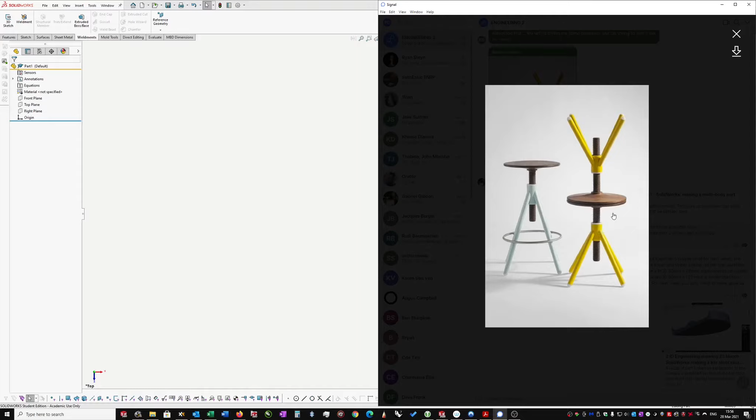In this video I'm going to show you how to make the base of this stool and the post and how to get them to move relative to one another. So I have a fair idea of the proportions of this bar stool and what I'm going to use, so I'm going to hop straight into Solidworks.

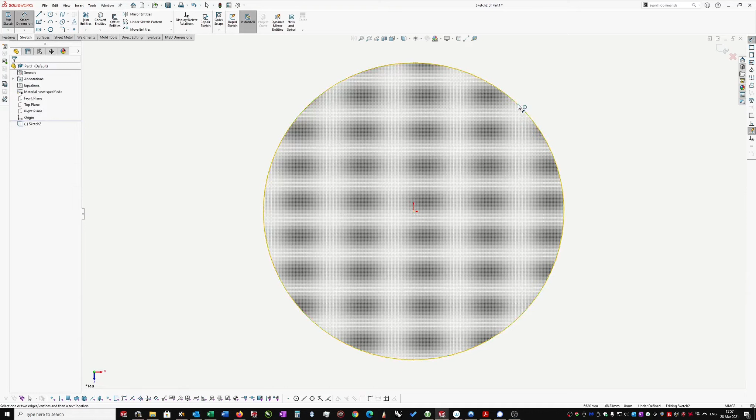So I'm using Solidworks 2020 and I've just created a new part, and I'm going to create a sketch on the top plane. And I'm going to sketch a circle. Actually, let's first dimension this. That's going to be about 500 millimeters. And then I don't need this to be solid, so I'm going to make it construction.

And now I want to put in some points that will be used to locate the feet. So I'm going to go one like this. Now I could, if I wanted to, do a circular pattern, but since there are only 4 of them, I may just as well click the 4 points like this. Just make sure that they're black. So those are on the 4 quadrants. They're 90 degrees to one another, and they're determined in size by this dimension here.

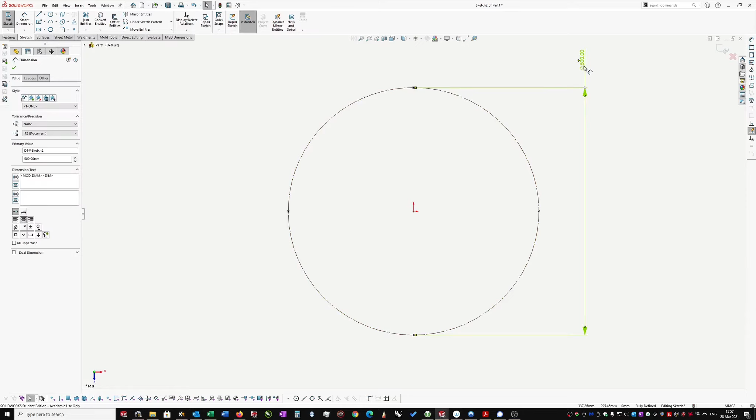So I'm going to exit that. Okay, so that's the base. You can see it's on the top plane. Now I need a second plane to be able to create the apex of the feet. So I'm going to select the plane, hold the control button, and drag another plane out. And then I can fill in on the left hand side how high I want that. So let's make that 300.

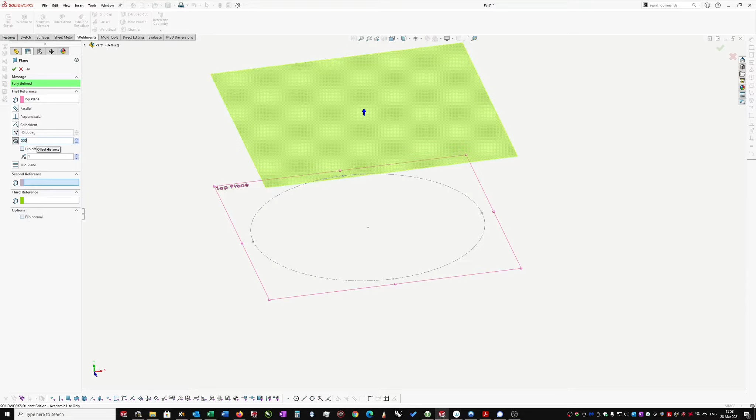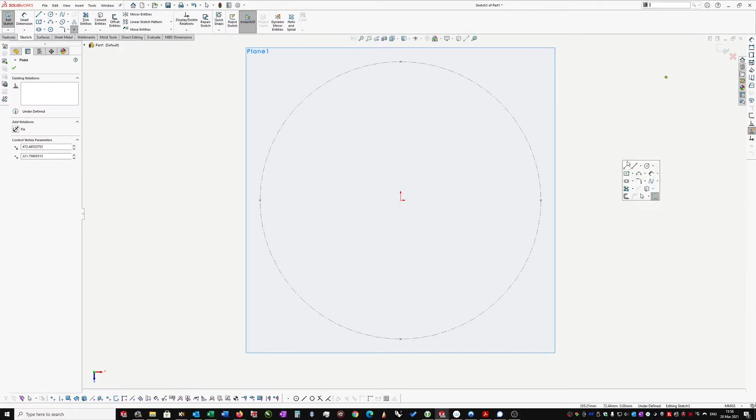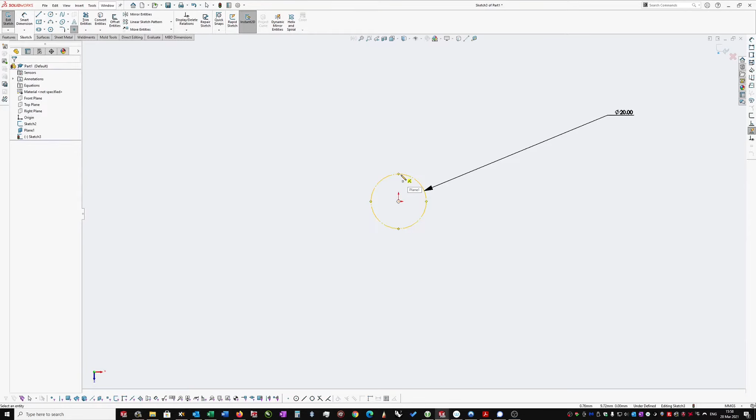Say OK. And then on this plane I'm going to enter a sketch, and I'm simply going to select the center, the origin point, and put a point in there. In fact, let's do this. I could put in another control circle. Let's make that quite small, like 20 millimeters, and make that construction. And then I need some more points, so one on that quadrant, this one, and the last one. Exit that sketch.

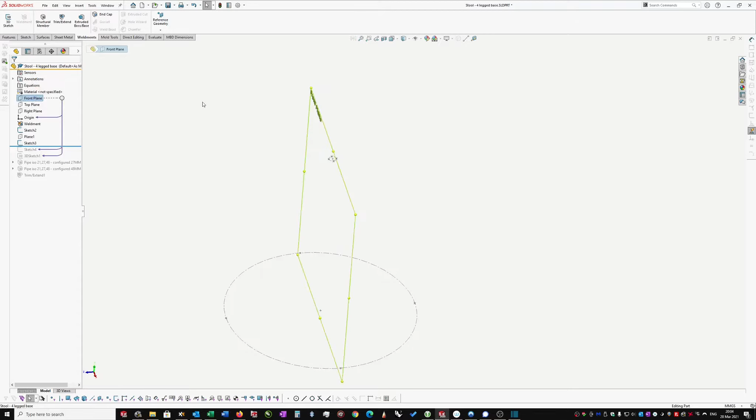Okay, quick edit. The line that I needed to draw in the center here didn't go so well in the last video, so I'll show it to you again. I'm going to select either the front or the right plane and put a sketch in here, lock that in place. I just need a line. I'm not going to draw this line to any of these points because I want to control it a little bit differently. Let's just do that again.

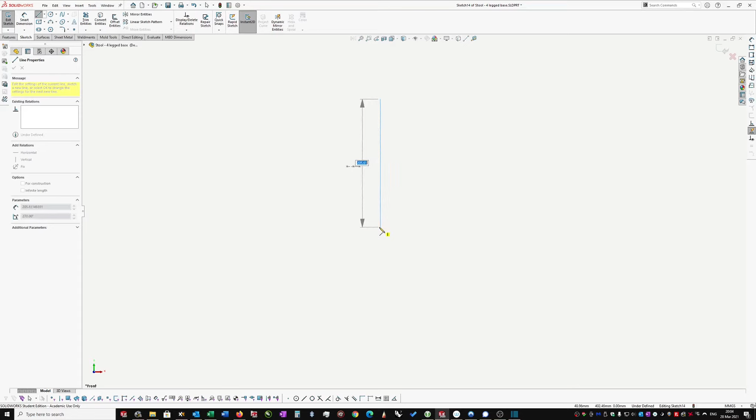What I could do is drag, and because I've got a certain command on, I can actually type in the dimension I want while I'm holding the left button down. Hit enter, and it'll put the dimension in for me. Right, so now I'm going to drag this around, because I want a little bit of the top of this line to appear above this sketch, and I want to be able to control that height.

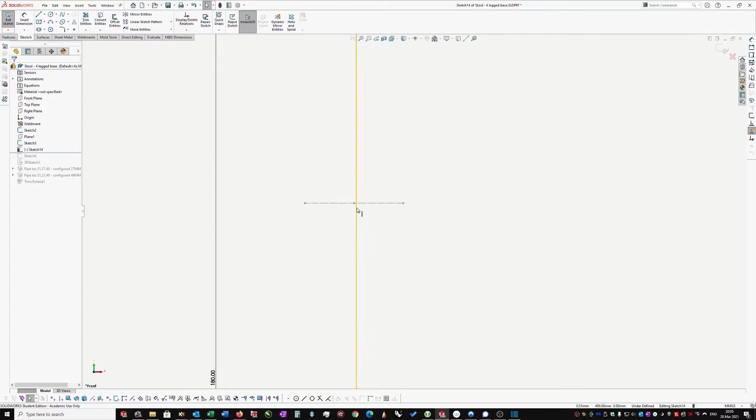Okay, so I'm going to click on the line, click on that point, and say to make them coincident. So because I've established what the length of the line is, that's fixed. I now just need to go from that point to there and say I want that to be whatever I want it to be, 70 in this case. Go out, right, and then you should continue from here.

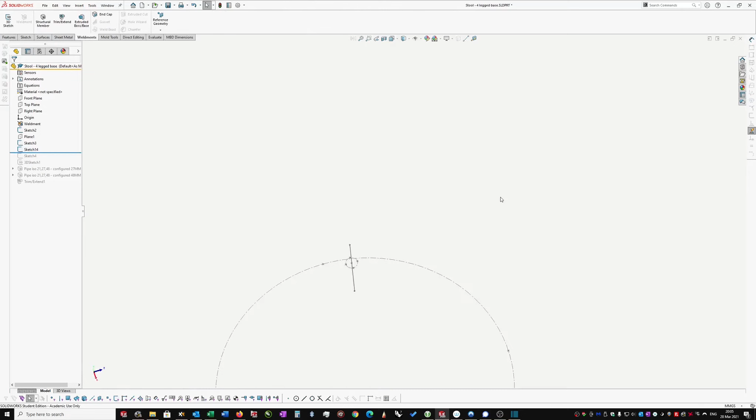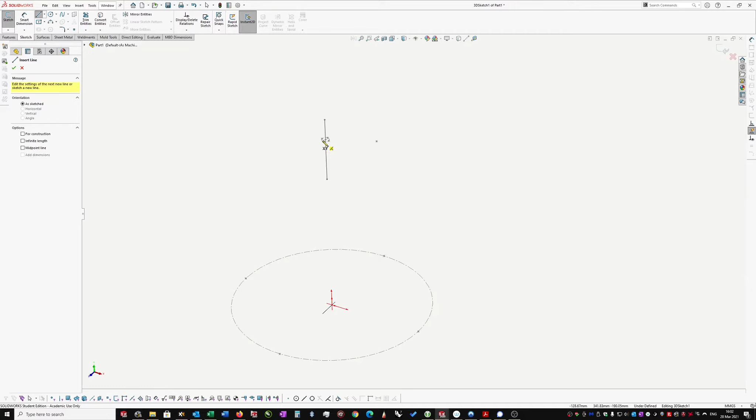Click on weldment, so that places it right at the top, and then I'm going to click on 3D sketch and put in. So this 3D sketch can be quite tricky until you know what you're doing. But for now, because I'm just using points to locate this, I don't have to worry too much. As long as you select those points in the same orientation, you're not going to have any problems. This is good enough for what you need to do now. Right, so that's going to be the basis for your 4 feet, and that's going to be the pillar.

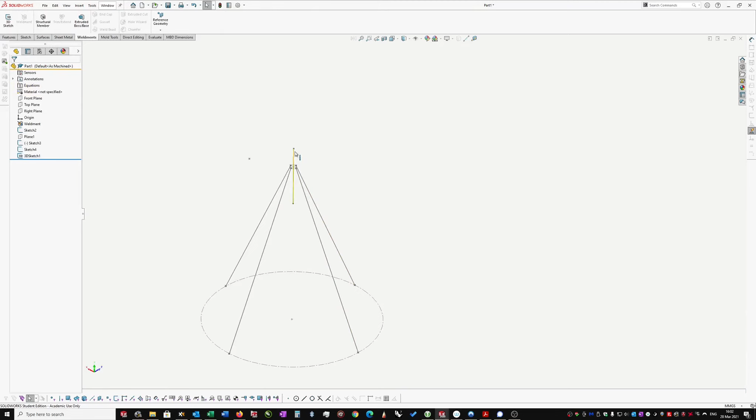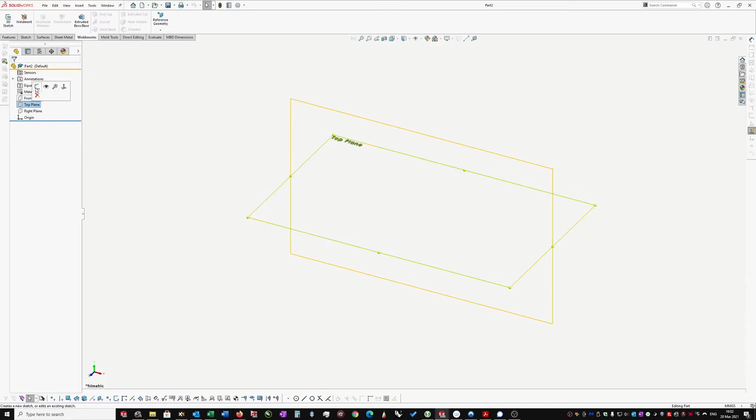Now we need to hop into a separate file. So I'm going to create a new part file, and I'm simply going to create sketches which describe the outside diameters and the inside diameters, the ODs and the IDs, of the tubes or the pipes that I'm going to use in that weldment file. So on the top plane, I'm going to enter a sketch.

And just to show you, I'm going to be referring to, not that one, let's delete that. I'm going to be referring to this table here, which is a set of the DN specifications for pipes, which is what you're going to have to use to specify anything using pipes. So it's a good idea to become familiar with this.

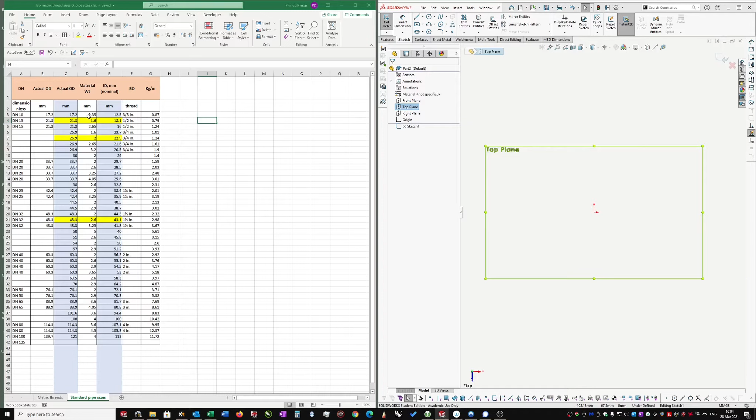So I'm going to use 3 pipe sizes. We only need 2, but I just want to show you something about how to use configuration. So we're going to use this DN15. I don't know what this 26.9 is. It's probably a DN17 or something. And then this DN32. So the OD, that's the outside diameter of each one of these, is 21.3, 26.9, and 48.3. And then the material weight, you can see that's the thickness, and then the ID is given. So these 2 dimensions, those 2 dimensions, and those 2 dimensions.

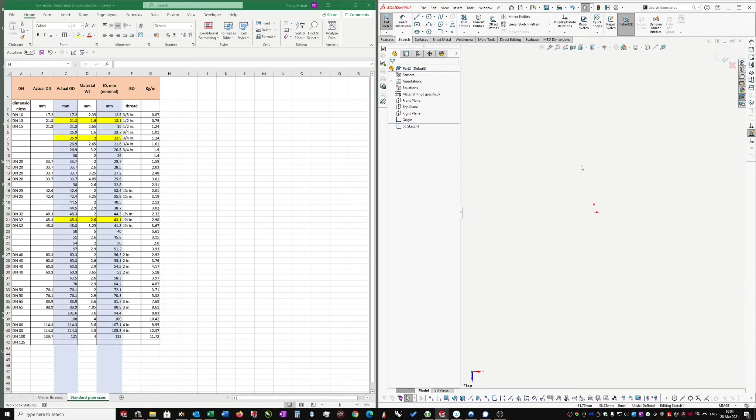So let's start with a circle, which let's create another one like this, and I'm only going to create one set of circles, and I'm going to dimension them from smallest to largest. So I'm going to go from that figure there, 18.1, enter, and then dimension this one, and that'll be 21.3. Enter, and then I'm going to exit the sketch. Oh dear, I think I left behind a dimension there. Yes, I did. I deleted it by mistake. Right.

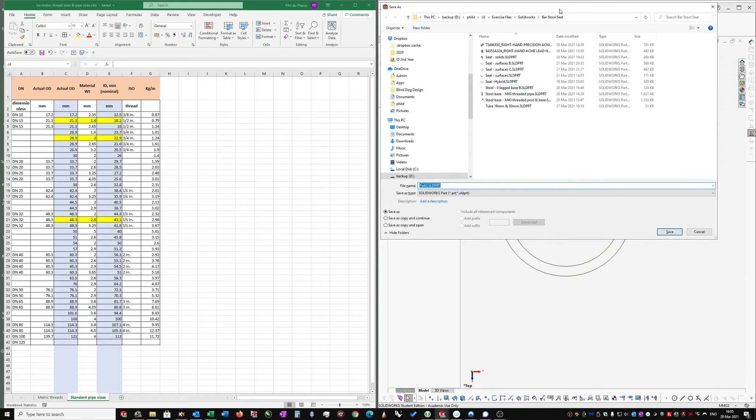Good enough. Alright, so now, because I'm kind of lazy, and because I know that I'm going to need 3 different sizes and I want them all in one place, I'm going to use the configuration manager to do that. But let's save this file first. So I'm going to just go and overwrite an existing one if it's in here. Tube. Let's call it pipe because that's more accurate. Just going to give it 21. I'm not going to worry about the millimeters. 27 and 48.

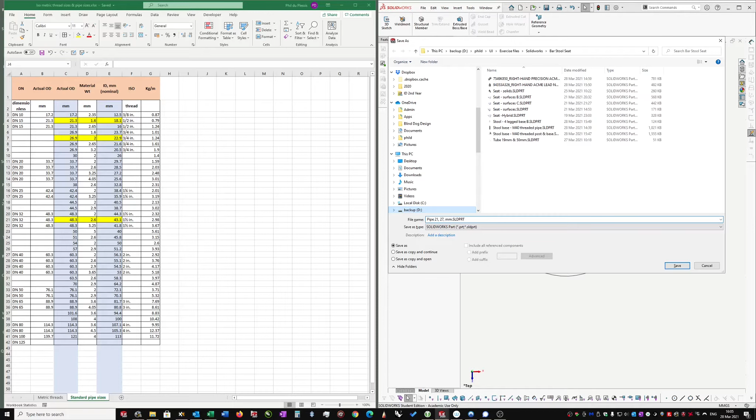Okay, so if you go into the configuration manager, which is the 3rd tab at the top of your feature tree, you'll see there's a configuration manager where you can now drive your configurations. So the first thing I want to do is I want to rename this default one. I just click and go. You should be able to click once and then hold it down and let go. And this one is going to be the 21. So I'm going to say 21 by 1.6 because that's the thickness.

Right, so I'm going to now create a new one. I'll right click here and I'll say add configuration, and let's call this one 27 times 2. So that's the 26.9, and the 2 millimeters is the wall thickness. And I'm going to create another one, add configuration, and I'm going to call this one 48 times 2.6. Okay, so there's the 48, and we're going to use the 2.6 millimeter wall thickness. So I've got 3 configurations.

At the moment, if I click on any of them, nothing happens to this sketch. But if I click on that configuration and I now click on the sketch, I'm going to double click on this dimension, and before I change this, have a look on the right hand side here. You'll see these 3 little bars. If you click on their little arrow, you'll be able to specify which configuration this dimension will apply to. So I'm going to click on this configuration, and we're going to change that to 26.9 and say OK.

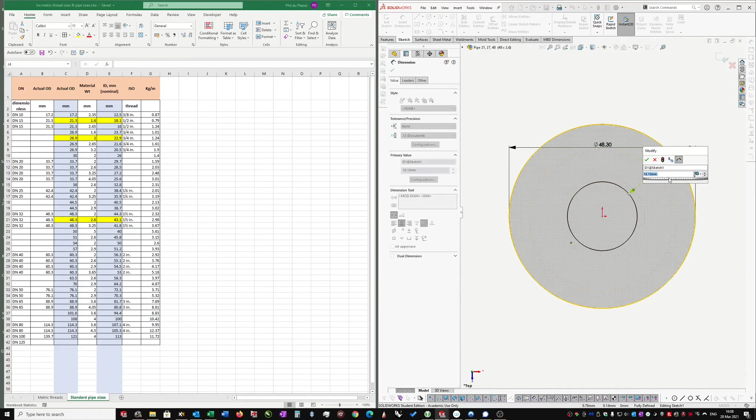So let's double click on the third one, click on the sketch. If you don't get the dialog box on the right hand side here, you can, on the left hand side here, go to configurations and say this configuration, make sure it's chosen the one you want, and let's make that 48.3, enter, double click on this one, and that should be 43.1.

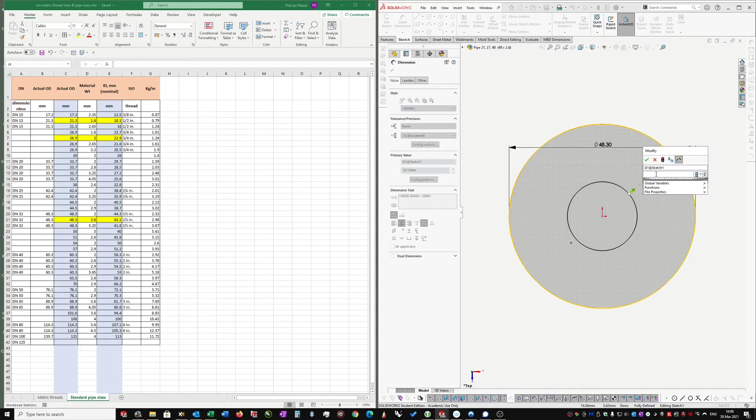Enter. Sorry, I don't want the variable there. I'm not sure why. Oh, unfortunately I clicked on this and I created a variable. We won't do that now. Let's hope it doesn't go back to the variable. Nope, it hasn't. Okay, so there we go. We have 3 different configurations. I can double click on any of them. Exit that sketch first. And you'll see it'll change the sketch size in real time, and we're done as far as that's concerned.

Alright, so now comes a tricky part, because I now need to save this as a library feature that I can use in my weldments. So the first thing I want you to do is to go to your options box, go to the file locations folder. You can either say edit all, in fact I'm going to do that, and then just scroll down to weldment.

Okay, I'm going to cancel that because there are too many. I'm just going to scroll down here, it'll be easier. So have a look at weldment profiles, and have a look at where they are. I've got 2 of them in here, but we're actually only going to use the standard one.

Let's edit that, or just click on it. You should be able to copy it, or just make a note of where it is. It's C program files, SolidWorks Corp, SolidWorks, and it's in my second SolidWorks set of data, Lang English, weldment. Let's just see if we can get that out. Weldment profiles, there we go. So you've either got to remember it, or you should be able to Control C.

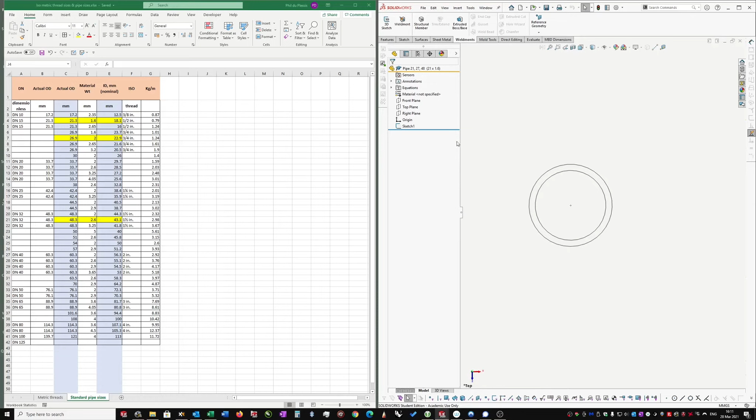Now you need to be very careful here not to select the sketch, either part, anything inside the graphics area. Only select the Sketch 1 command inside the feature tree. Only select that, do not select anything else. Then say File, Save As, and now it should default to the last known folder. I'm going to click in here and then say Control V, and there you'll see it will.

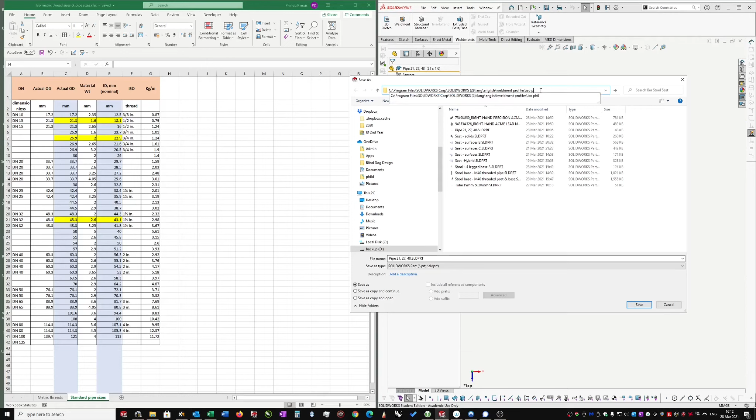Right, so it's going to go to my folder. I created a folder of my own here. I'm going to see if I can go to ISO. Right, so let's just go quickly into this.

Weldment Profiles has these 2, ANSI inch and ISO. I've added a 3rd one, it's got those 2 in there. You don't need to add this 3rd one. Just click on ISO, and then before you do anything, make sure that you scroll down in the list of files available. Click on Library Feature Part, that's SLDLFP.

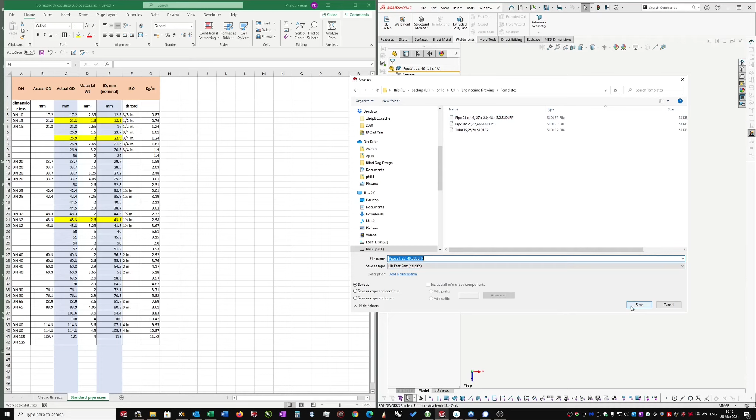Okay, and then save that as whatever it is you want to save it as. Don't make it too complex, make it something that you can figure out. So here's one of my original ones in here already. I'm going to leave it as that one and say save, and then I can actually exit the sketch.

So I should now be able to choose one of those 3 diameters that I entered: 21, 27, and 48. I'm not sure if that's correct, but it doesn't matter, we can sort this out later. So that's going to be 27 diameter.

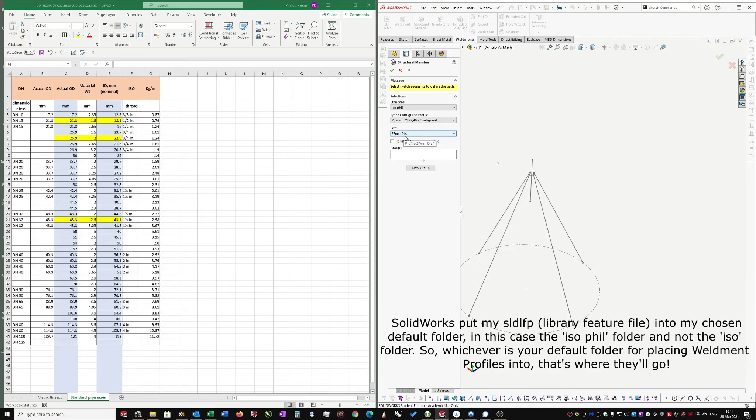Now a group, here it says new group. A group can only be created if 2 lines are touching one another, perpendicular to one another, tangent, or if they are parallel to one another. So I will be able to select one of these, but I will not be able to select the others. If I try, it won't work.

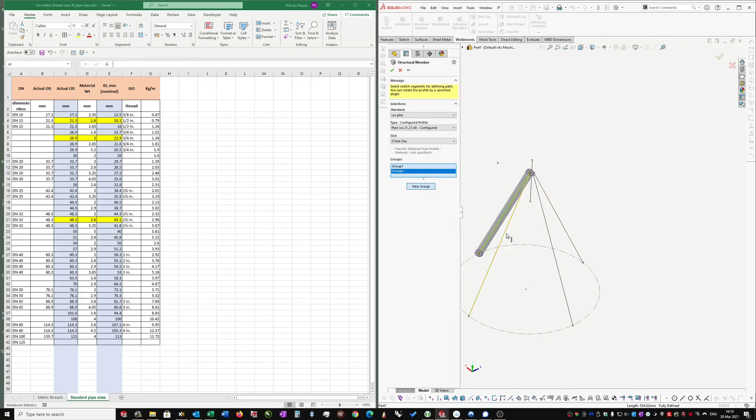So I have to create a new group. So just go new group and then select another line, new group, another line, new group, and the last line. And then you say OK.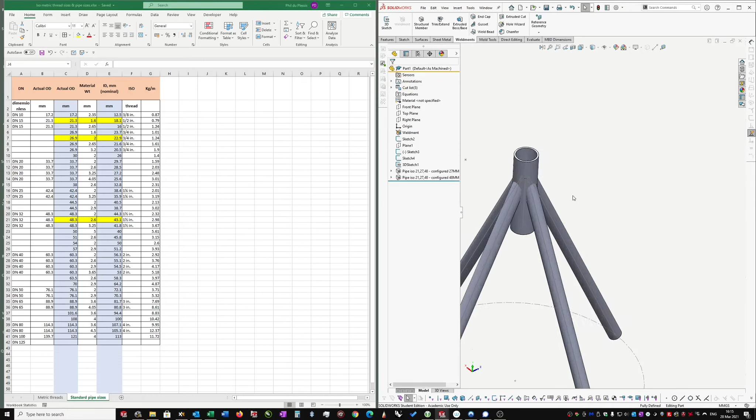Alright, so I'm going to click on this line. I'm going to say I want a structural member here, but this time I'm going to select the 48mm diameter, and it's put it into a group of its own already. Okay, so now we've got these items connected to this pipe, but you can see that they're intersecting with one another.

So here's where these sketches can come in handy. I can now change this - let's say I'm going to make it too large deliberately so that you can see what happens. So if I exit this, you'll see what happens on the outside here. That's not connecting nicely, so ideally that would just be a point, but I just needed to show you how you can use the sketch to drive things in other instances if you want to.

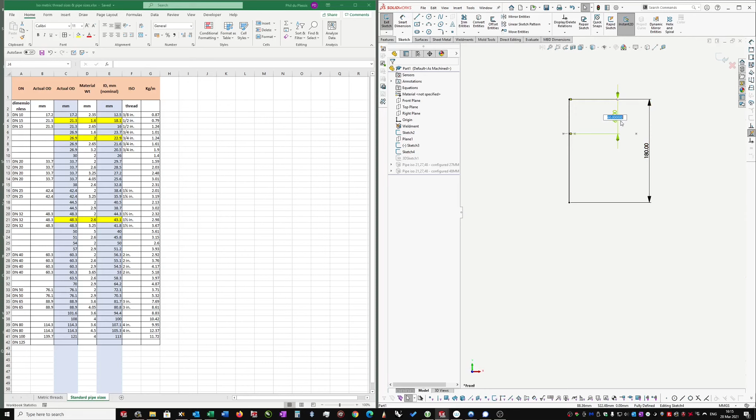Alright, and let's say I don't really want this - it's not connecting nicely in the middle. I can just double click on that sketch, and let's say I want to increase that to 75, so it's going to move the whole sketch up a little bit, and now these are connecting more centrally. I'm going to leave it like that. You can tweak it if you want.

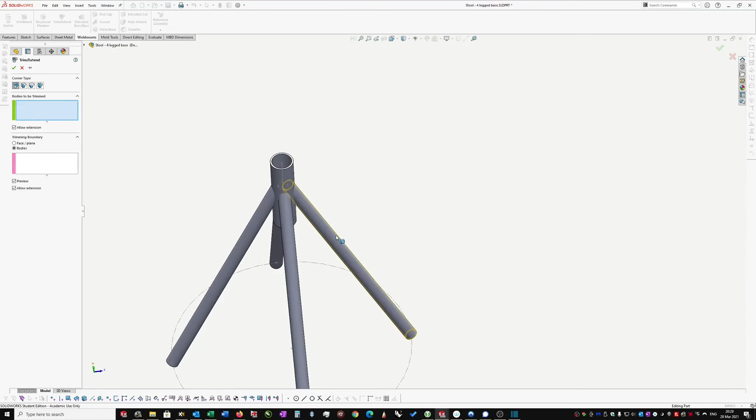Okay, so all that remains is to trim these tubes to one another. So I'm going to select the trim extend command, and I can select these 4 legs, and then move to the bodies that I want to trim them to. There are various permutations at the top end but these will all work, though they won't cut them off nicely like we want over here. So I'm going to say OK to that.

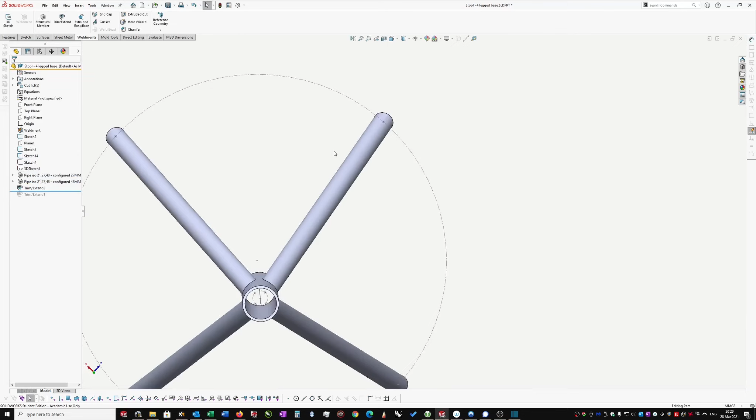If you have a look inside, you see it's trimmed them off, and these legs, when you bring them into a drawing, will be available as a single part that you can just say make 4 of them, so you only dimension once. And that concludes this part 1.